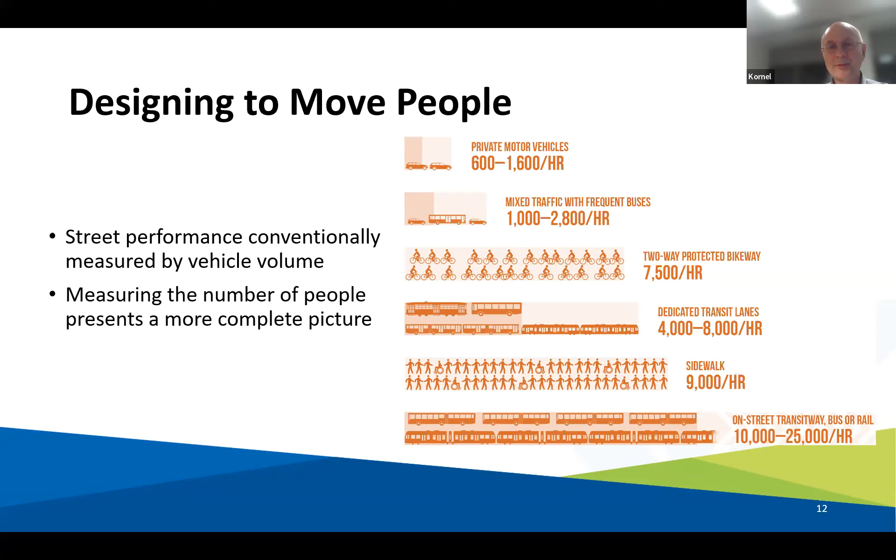The point is that the reason why we have to look at other modes of transportation is that the car is a kind of a beautiful thing to do many trips to many locations. But at some point in the development of a city, the car is the least efficient mode of travel, it uses the most space. So its role must decrease, and it will decrease, I mean.

Next slide. About this project, a little bit about the background. This project started actually in 2019 with the pilot project in conjunction with the city of Waterloo. We had 5 corridors where we implemented separated cycling facilities.

The objective of that pilot project was to see if the separation of cycling on these streets, where we had very little cycling, would help us increase the number of cyclists and attract new cyclists. And actually we learned that yes, the same thing happened in the region as happened in every other city where they separated cycling facilities from motor vehicles.

We had a significant increase in the number of people, and people who would never cycle on those streets, including me, for example, on Columbia - I would never cycle on Columbia, but with that little separation that was there, I did cycle on Columbia, and that's what we heard from other people as well.

So we went to council, we presented the results of this pilot, and there were 2 things that we learned: that yes, this is an effective way to increase cycling. And the second thing we learned is that the way we designed the pilot - and the pilot is always kind of quick and cheap and dirty, what you can put together at a relatively low cost - that design has a relatively high maintenance cost, winter maintenance cost.

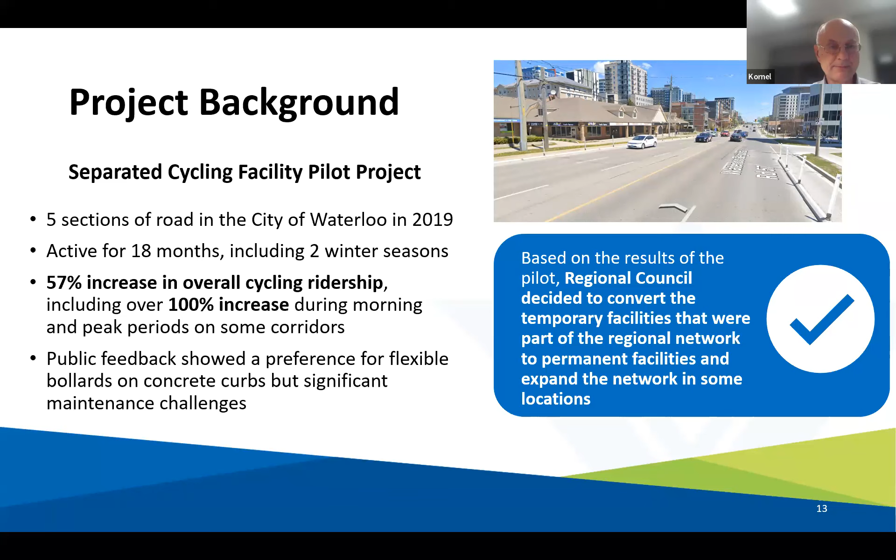Why separate these cycling facilities? Those who are cycling regularly or from time to time probably don't really need me to answer that question. But I still felt it's important to say the reason we separate cycling facilities is primarily safety. Cycling in mixed flow traffic is not the safest thing to do, especially if you have high volume, fast vehicles, and fast is already 50 kilometers per hour, because if you are hit by a vehicle at 50, chances of survival are not so great.

And what we also heard from the public, especially the elderly, is that they don't prefer having cyclists in the same lane as they are traveling. They are afraid of hitting them, and cyclists sometimes do crazy things, and that was also pointed out to us. From that perspective, separating cyclists, putting them into another space, is a much safer and better solution for all road users. Only a small percentage of the population would cycle in mixed flow traffic, up to 3 to 5%. And we also know that most of the population, more than half, is interested in cycling, but they are what we call concerned - unless they are separated from vehicles.

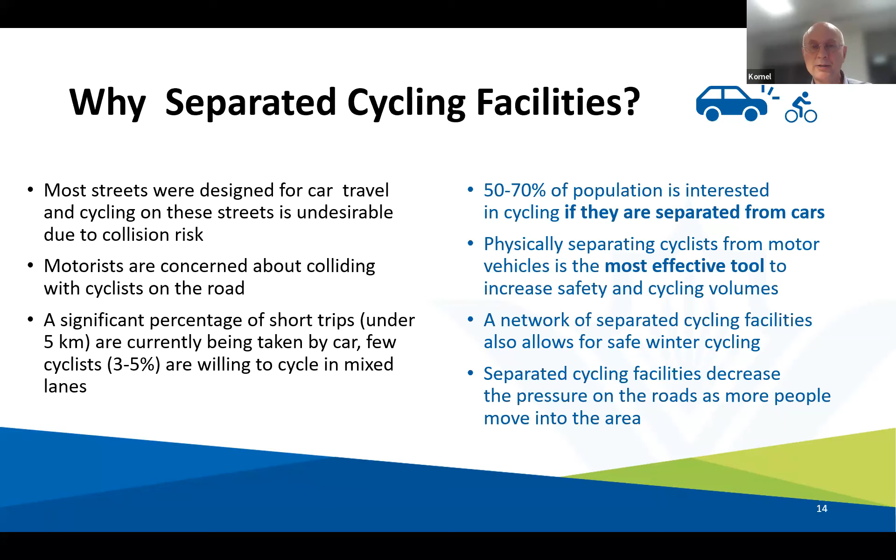And finally, I got to the road diet. Road diet—nobody likes diets, and maybe it's not the best way to call what we are trying to do in some of the corridors, but this is the language we use in the TMP. The reason we call it road diet is that we have to find the space for cycling facilities. Sometimes there is space in the right of way, for example a section of University Avenue, so we are leaving the existing lanes more or less as they are. But in some other corridors there isn't space, so we have to reallocate it—making the roads reserved for vehicles narrower. In the 2018 TMP, both Bridgeport and Erb Street were identified for the diet.

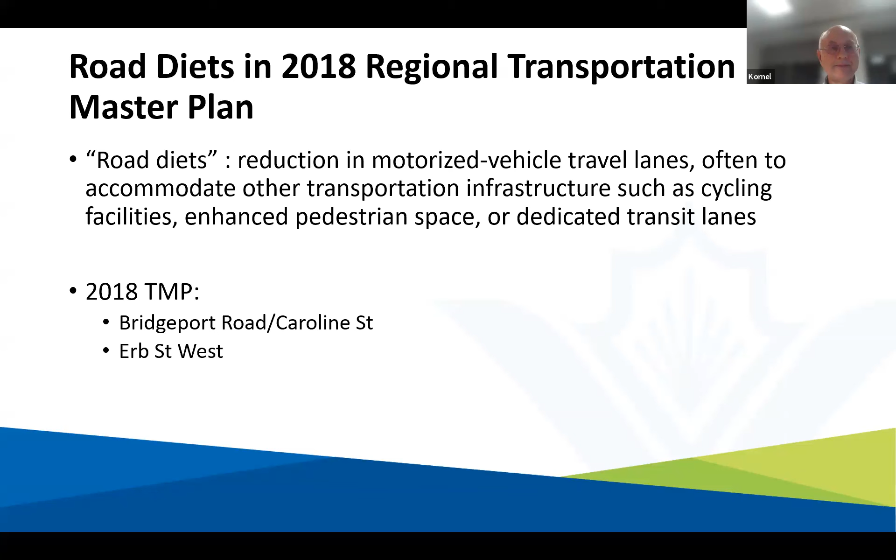Project scope. There are quite a few corridors in this project, and we group them into two categories. Some are by conversion—meaning the conversion of the pilot project to permanent facilities—and the other sections are the expansion part, where there are no facilities today and we are adding new facilities. I'm going to show you, you don't have to read this.

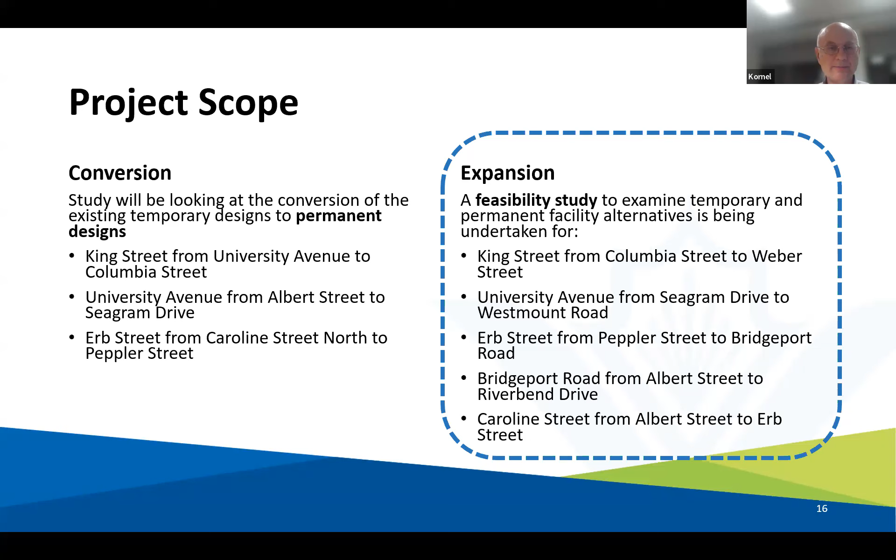You'll see this on the map on the next slide. These are the corridors we are studying and presenting to you tonight. On King Street, for example, the dotted line means the section that already has cycling facilities, and the solid section is the new section. University is similarly new and existing sections.

For streets where we already had cycling facilities through the pilot, the decisions were much easier, because we basically continue the type of facilities or concept applied in the pilot for the ultimate design—meaning whether it's single directional, two directional, one side or both sides of the road. On Bridgeport and Erb, we only had a very short section in the pilot on Erb Street, shown as the dotted line. So the solid line on Bridgeport and Erb, being much longer, is basically the biggest change here.

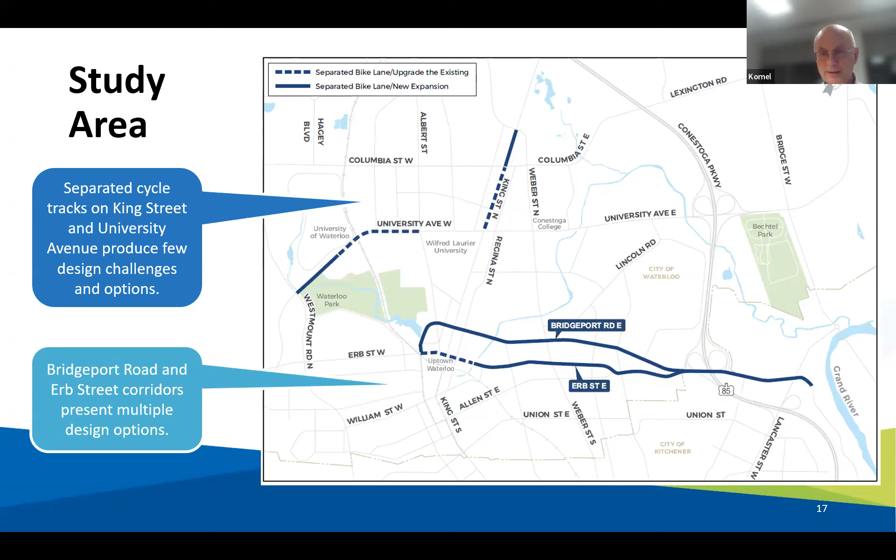And I think the next slide is going to be the consultants.

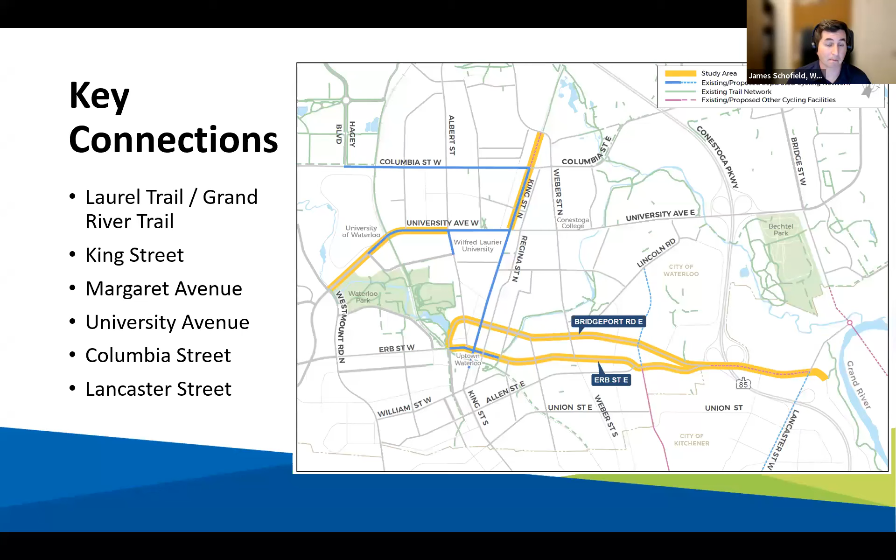So you can see that this is a project that's not working in isolation. They're not five isolated corridors, they're really part of an overall cohesive network that forms several important connections that will help you get around Kitchener and Waterloo.

Some key considerations we thought about throughout the project: over at the east end, there's an opportunity to connect to the Grand River Trail system from the end on Riverbend Drive. There are existing signalized intersections along Bridgeport and Erb at Margaret that make for a nice connection opportunity to the north and south, and there's future and existing facilities on Margaret Avenue as well that we can tie into.

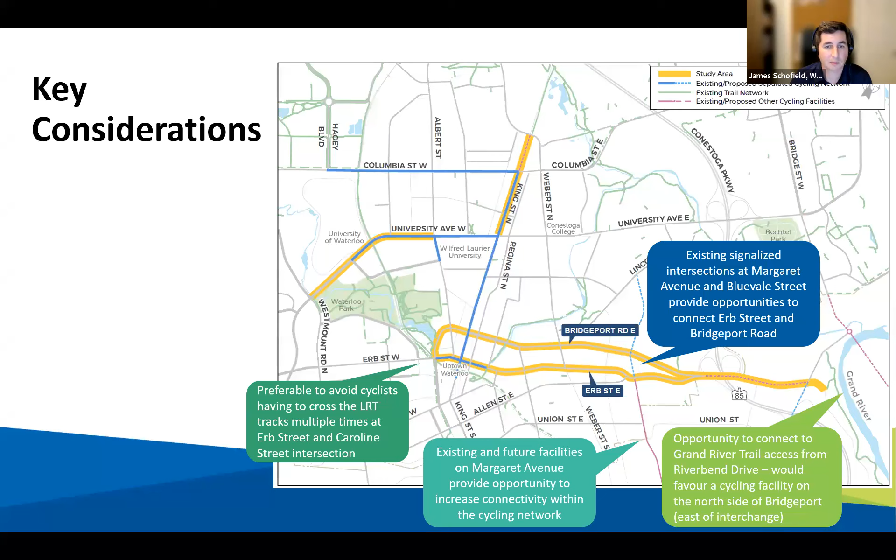In the Uptown Waterloo area, the intersection at Caroline and Erb is quite complicated, with the LRT crossing diagonally through there. So quite a bit of consideration went into how we get cyclists through that intersection and minimize the number of times people need to cross over the tracks. These are some of the key considerations throughout the project.

I'm going to talk a little bit about the evaluation process. If you were here at the first public meeting last year, some of this will be familiar, but the evaluation process is fairly complex because of the number of options on Bridgeport and Erb, being a pair of one-way streets. How do we go about thinking about the best approach to implementing cycling facilities on those streets?

Step one: we thought about what's the best type of cycling facility for each corridor. Is it a painted bike lane on the road? Is it a multi-use path? Is it a separated cycle track? We'll talk a bit more about what all of those terms mean in the coming slides.

Step two: should the cycling facilities be going one way or two ways? Because Bridgeport and Erb are one-way streets, does it make sense to have the cycling go the same direction as the traffic, or to allow cyclists to go in two directions on those streets?

Step three: looking at what side of the street the cycling should be on - the north side, the south side, or both sides. That was another consideration. Step four: looking at potential connecting facilities between those cycling corridors, like Margaret Avenue and the trail at the east end of the corridor. Step five: identify and mitigate the potential impacts of each design alternative.

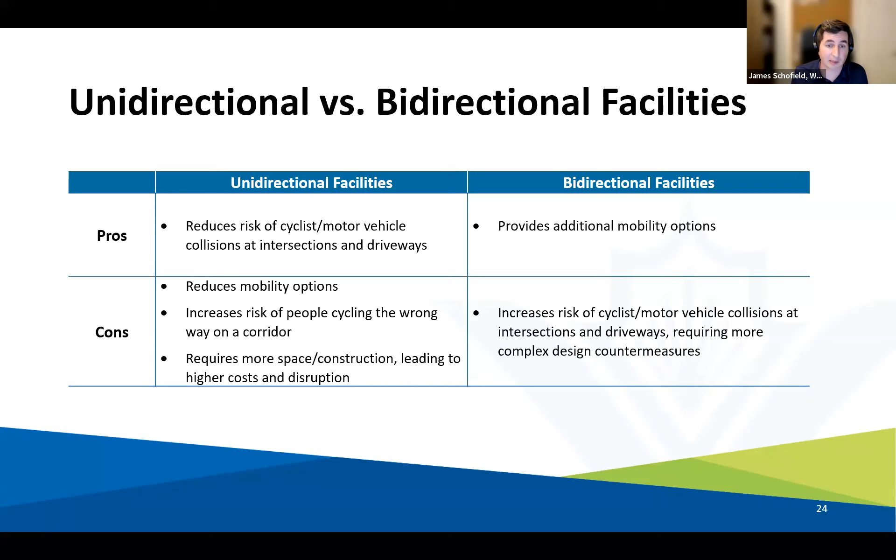When we talk about separated cycling facilities, there are a few different types, and you may already be familiar with some of these throughout Waterloo region. On the left, we have separated bike lanes—a bike lane within the existing roadway. Like the pilot project facilities implemented earlier in Waterloo, these can use temporary or quick-build materials, like concrete curbs installed onto the existing roadway, or flexible posts or bollards to help delineate. It's a cycling facility often retrofit within the existing roadway with some measure of physical separation between cyclists and adjacent motor vehicles—something more than just painted lines on the road.

Meanwhile, when we talk about cycle tracks, we mean something actually above the curb—often next to the sidewalk or at the same height, but with a curb separating that cycling facility from motor vehicle traffic. So cycle tracks are above the curb, usually next to the sidewalk, and separated bike lanes are below the curb within the roadway. The third option is a multi-use path, which shares similarities with the cycle track in that it's above the curb. The main difference is that a multi-use path is shared between cyclists and pedestrians, whereas a cycle track is exclusively for cyclists.

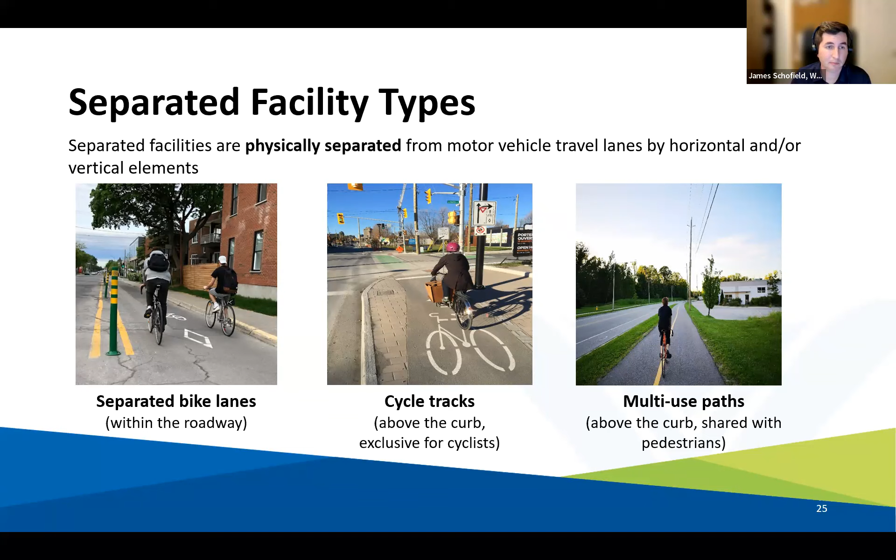In the earlier stages of the project, we looked at a number of different design alternatives, especially for the Bridgeport and Erb corridors, which were the most complex parts of the project. We evaluated these alternatives using a number of criteria, listed here, including traffic and transportation—looking at how effective the design would be at achieving the cycling mode share shift that Cornell was talking about earlier, and what the impacts would be on motor vehicle delays or queuing, noise, and air quality.

We looked at safety and conflict mitigation, between cyclists and vehicles, cyclists and transit, conflicts especially at the Highway 85 interchanges, and mitigation measures for all those types of conflicts. We looked at utilities, trying to understand if particular design alternatives presented more challenges—for example, a series of hydro poles being in the way of the desired location for the cycling facility. We also looked at constructability, how much effort it would be to build and the complexity of that, and the cost to construct, operate, and maintain the facility.

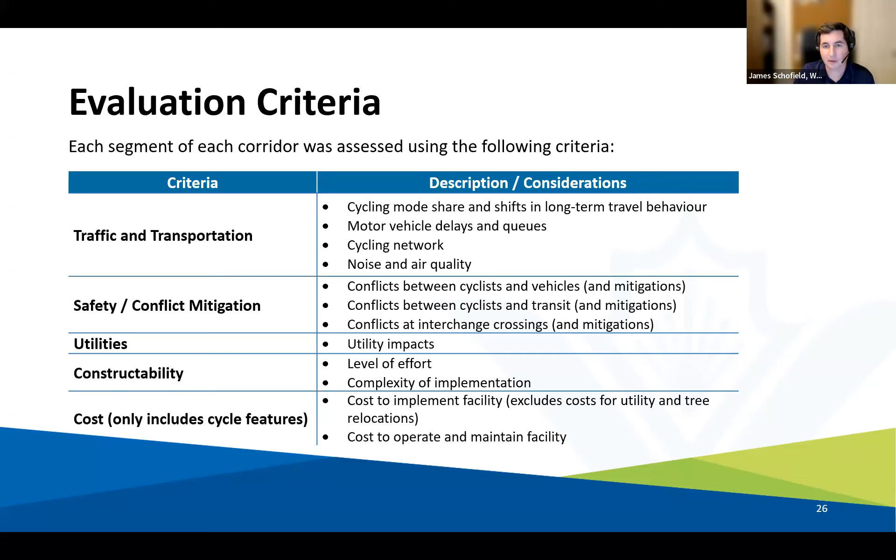These were all the criteria considered as part of the evaluation process, which ultimately led to the selection of a proposed design alternative. The proposed design we're presenting here, we'll go corridor by corridor and talk about each. Let's start with King Street.

On King Street, what we're proposing is essentially very similar to the existing pilot project, shown in the image at the top right. The pilot project used concrete curbs and flexible bollards put on the roadway to implement a cycling facility quickly using those retrofit-style materials.

As King Street is reconstructed, the proposed plan is to take those cycling facilities and move them from the roadway up into the boulevard, so there's more separation from traffic and we narrow the width of the roadway. You'll still have the same number of motor vehicle lanes on King Street—one lane per direction—and a center turn lane in the middle of the street. However, the cycling facility, currently in the roadway, will move up into the boulevard, achieved by taking the existing curb and moving it inward toward the center of the road.

So the design has the cycle track in the boulevard adjacent to the existing sidewalk, with a buffer between the cycle track and the roadway. You see the same configuration on the other side of the street—cycle track and sidewalk. These cycle tracks on King Street will be unidirectional, or one-way: cyclists traveling north on this side of the street and south on the other side, just as it is today with the pilot project.

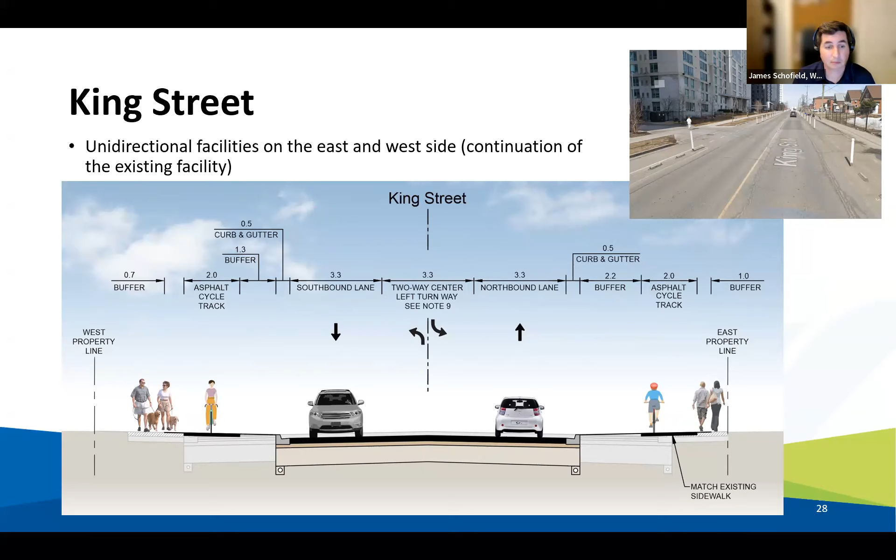An example of a typical intersection along King Street is shown here. This is showing the intersection of King and Columbia, and you can see that we're going to attempt to make connections between all of the intersecting cycling facilities, such as the one along Columbia Street, using a type of design that you may have heard called a protected intersection. So we're trying to apply protected intersection elements to the design to make those seamless connections, making it easy for a cyclist who wants to turn left, for example, to come along here, tuck into this corner, wait for the light to change in the opposite direction, and continue along Columbia Street.

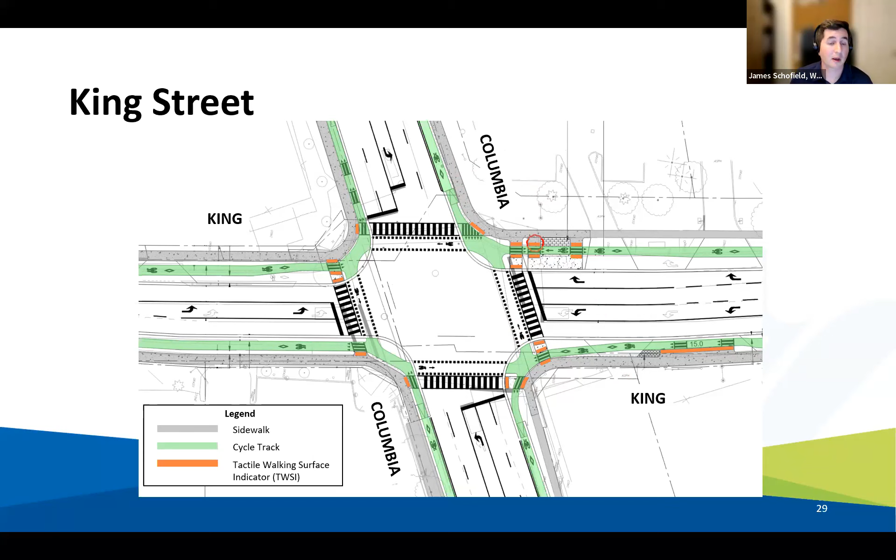So this is a typical intersection along King Street. And at the end of the presentation, we're going to share a link with the complete design drawings, so if you want to go look into the details more, you'll be able to do so.

A rendering of King Street showing the existing condition on the left and the proposed condition in the future on the right. Again, you see that existing on-street bike lane becomes moved up into the boulevard and the curb position moves inward. Same number of motor vehicle lanes though: it's 3 lanes existing and 3 lanes in the proposed future condition.

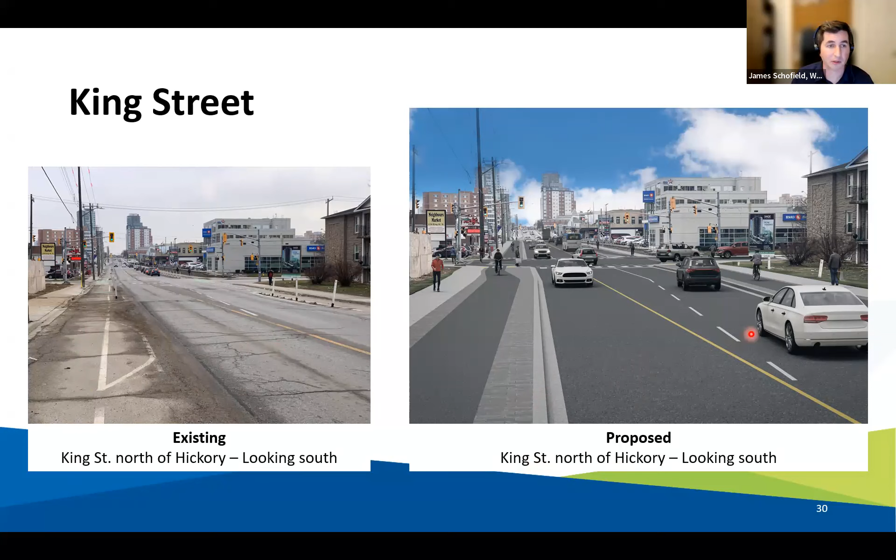Moving along to University Avenue. It's similar to King Street in that we're taking existing bike lanes that are currently on the road and moving them up into the boulevard by pulling the curbs inward towards the center of the road. There's not going to be any change in the number of travel lanes on University Avenue—it will remain as it is today with 2 lanes per direction. We're looking here at the portion west of the University of Waterloo campus between Seagram and Westmount.

Again, similar to King Street, we have an asphalt cycle track up in the boulevard. Sidewalk is next to it, and a bit of a buffer between the cycle track and the roadway. Similar condition on the other side of the street. We are suggesting a short segment of 2-way cycling on this portion of University Avenue to provide better connectivity to and from the UW campus from Westmount Road. So there'll be eastbound on the south side of the street and a 2-way facility on the north side of the street in this segment.

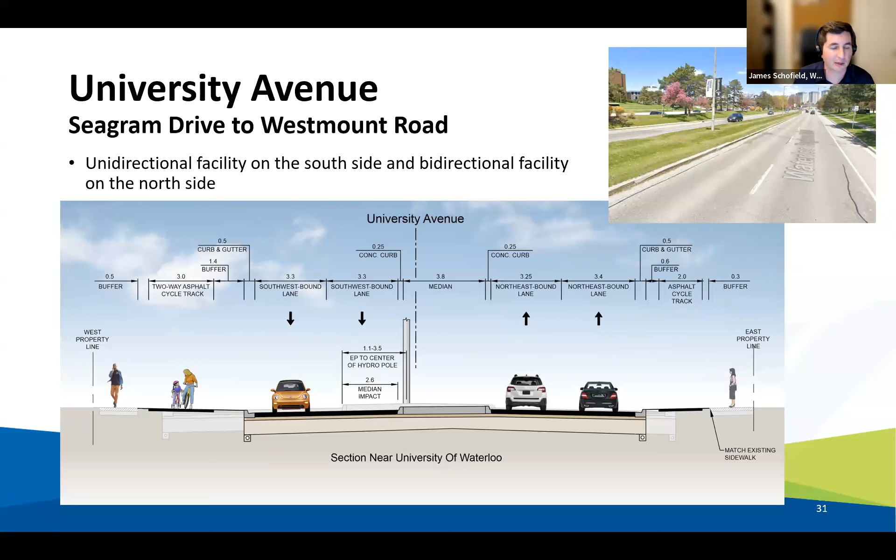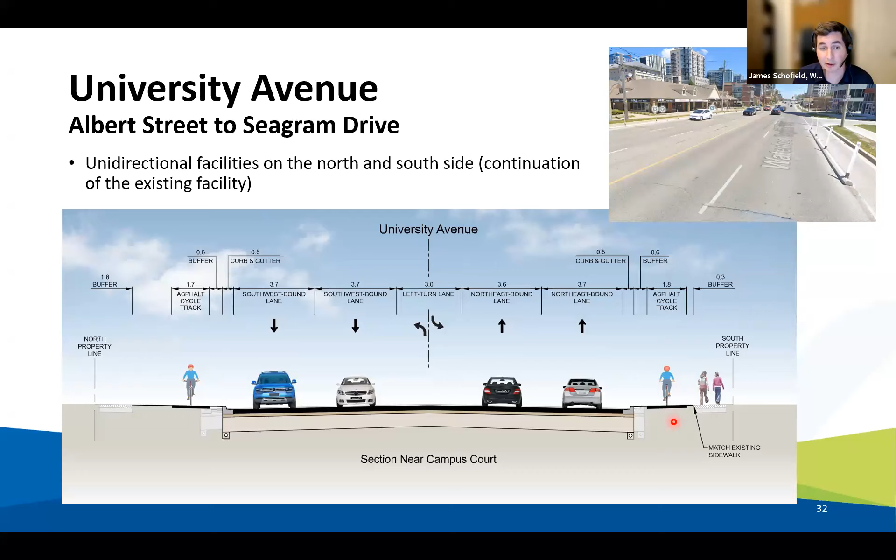As we move east along the corridor, east of campus now, we again maintain the same lane configuration that we have there today: 5 lanes in total, 2 lanes each direction, and the center left turn lane. Again, what we're doing is taking that existing on-road separated bike lane that was implemented as part of the pilot project and moving it up into the boulevard, converting it into a cycle track next to the sidewalk.

Another drawing of a typical intersection here, this one showing the intersection of University and Seagram. You'll note a number of similar design features as the King and Columbia intersection shown previously. You'll also note there's integration with transit stops here on both sides of the street, so there'll be a nice wide platform for people to get on and off the bus, and a place where a bus shelter could be placed.

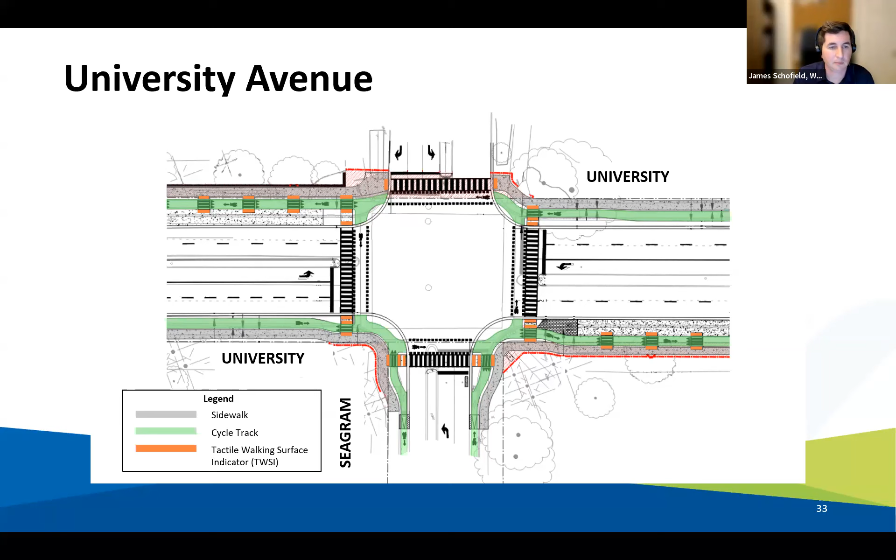When we come to Bridgeport and Erb, these were much more complicated corridors. Unlike University and King, where it was fairly straightforward to just take the existing design from the pilot project and carry it forward, we really had to think a little more critically about Bridgeport and Erb. We came up with 4 different design alternatives for these corridors.

Alternative 1 was having cycling on the north side of both Bridgeport and Erb, continuing on the north side east of the Highway 85 interchange. Option 2 was being on the south side at the Highway 85 interchange, continuing along the south side along Erb Street, then transitioning to the north in the Uptown Waterloo area.

Option 3 was to have one-way cycling facilities, so westbound on Bridgeport, eastbound on Erb, on the outside of both streets. In both options 2 and option 3, there was a connection here to connect from the north to the south.

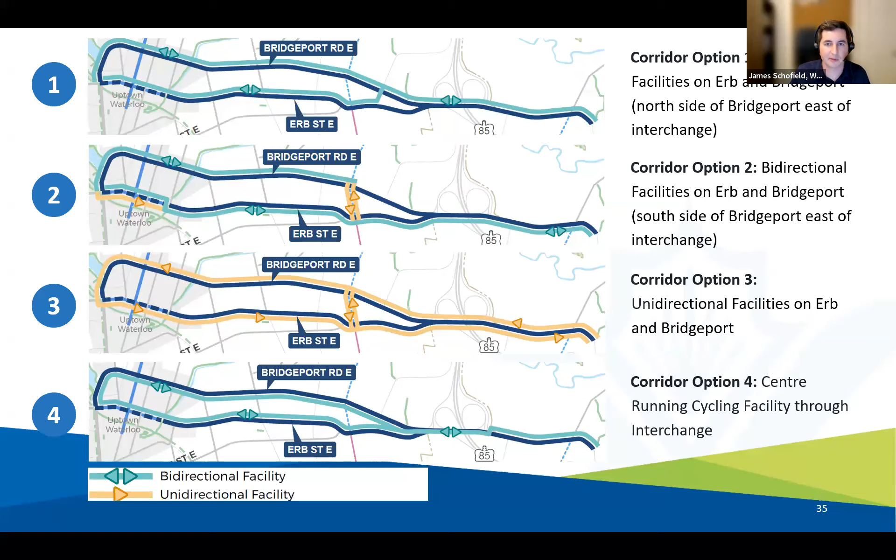So we looked at all 4 of these alternatives and evaluated them using the criteria that I presented earlier. When we came to the first public meeting last year, we had identified both option 1 and option 2 as the top 2 options to carry forward for further study. At that point, we had recommended ruling out option 3 and option 4.

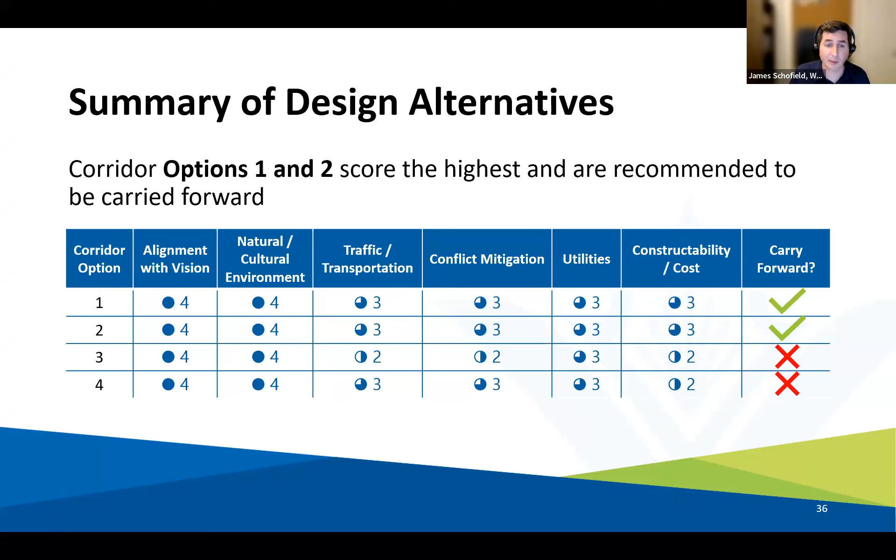Since that time, we've been doing quite a bit more analysis, having more discussions with technical stakeholders about the different options, also listening to the feedback that we received from the public since that first meeting. And option 1 has emerged as the preferred alternative.

So option 1, again, is being on the north side through the Highway 85 interchange, continuing along the north side all the way over past Lancaster Street, and on the north side of both Bridgeport and Erb. If you're coming along Erb, there'd be a connection at Bluevale. You would come along Erb, go on to Bluevale for a short block to get up to Bridgeport, and that's how you would continue along past the Highway 85 interchange.

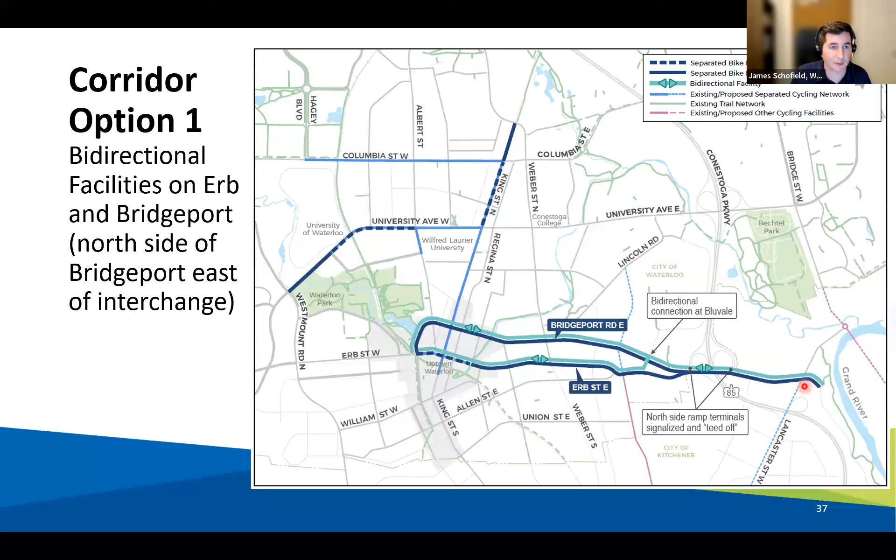Looking at some of the pros and cons of option 1, it kind of meets the project objectives of implementing that complete streets approach, providing that east-west cycling connection. It works pretty well at the intersections. It provides cyclist safety by providing physical separation, having a cycle track up above the curb in the boulevard space. The cost of option 1 was favorable compared to the other options, and there were no significant impacts to natural or cultural heritage environments or to utilities.

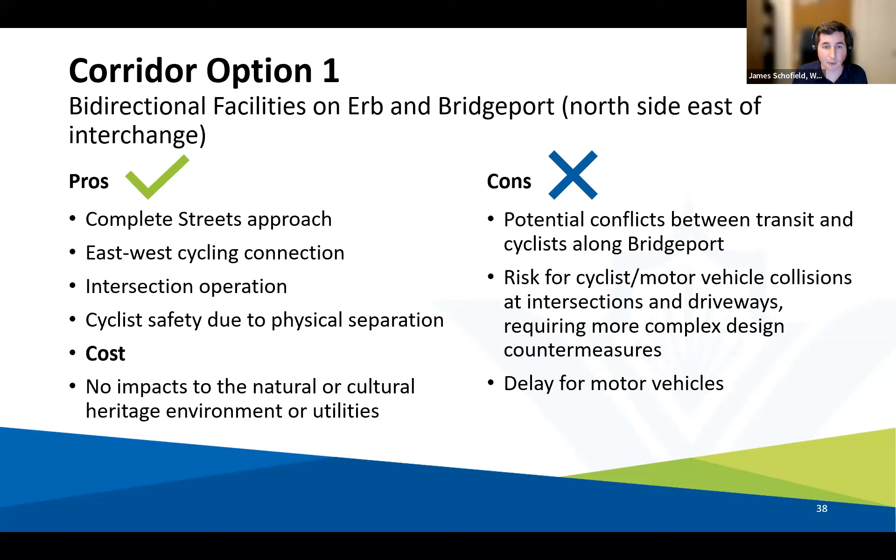Some of the negatives of option 1: there's potential conflict between transit vehicles and cyclists along Bridgeport, or rather passengers getting on and off transit vehicles at the bus stops along Bridgeport. And because of the bidirectional, or two-way, cycling on Bridgeport and Erb, there is a bit more attention required at the intersections and driveways to mitigate some of the risk of having two-way cycling on that street. At some particular intersections, some additional delays for motor vehicles can be expected with this option.

Looking at option 2 in a bit more detail, again, option 2 was one of the 2 options that we carried forward from that first public meeting. Option 2 was being on the south side at the interchange and on the south side along Erb Street. There were 2 sub-options here: either continue along the south all the way to Caroline, or transition to the north at the Laurel Trail crossing and continue into Uptown Waterloo on the north.

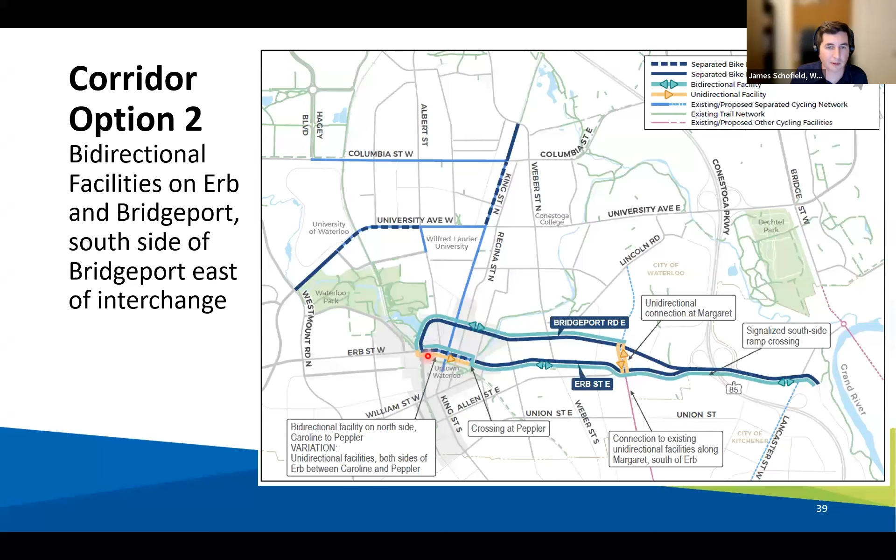So that was option 2. Some of the advantages and disadvantages of that, some similarities here. Option 2 also met the complete streets approach that we're trying to achieve, provides that east-west cycling connection, works reasonably well at the intersections, with similar safety.

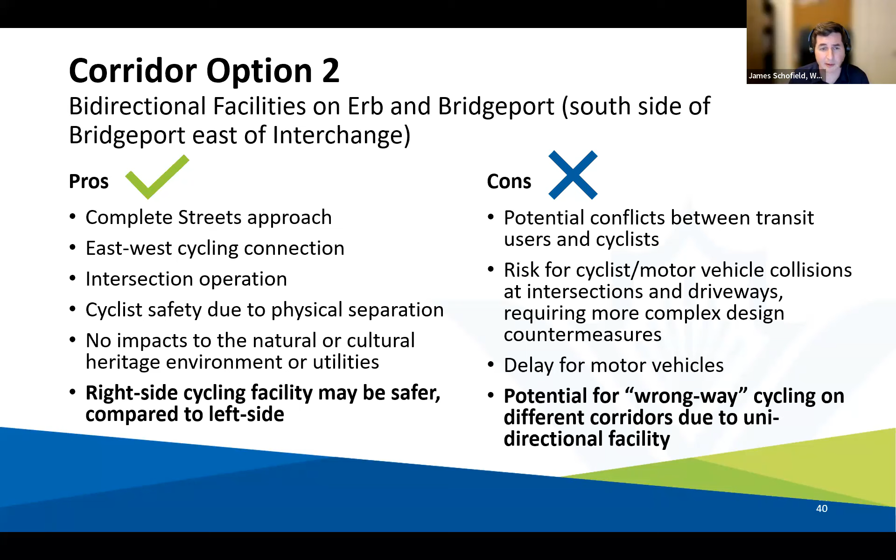There's some argument that cycling on the right side of the road may be slightly safer than being on the left side, so a benefit for option 2 there. We still have some conflicts between people getting on and off the buses and cyclists with this option. We still have some complexity with the driveways and intersections, and we still have some delay with this option. So options 1 and 2 are pretty comparable on those points. There is a short unidirectional cycling portion through Uptown Waterloo with option 2, which introduces some potential for wrong-way cycling in that Uptown Waterloo portion of the corridor.

And so, as I mentioned, option 1 was ultimately determined to be the preferred option. We heard from technical stakeholders, including the Ministry of Transportation, that their initial preference at the Highway 85 interchange was to be on the north, following option 1. This is still yet to be confirmed, as discussions with MTO are ongoing.

The City of Waterloo's Active Transportation Advisory Committee voted in favor of option 1 as their preferred option. And from the public, there was a clear preference for option 1 in the feedback we received since that last public meeting last year. Some of the themes of the comments were that people felt it provided comfort due to the physical separation of the cycling, that it provided good connections to other existing cycling facilities, and that it actually reduced the number of driveways that need to be crossed. I believe that's largely due to being on the north side east of Highway 85.

There was feedback that members of the public felt that it was the safer of the two options at the Highway 85 interchange. There was support for the fact that it would help calm down traffic on Bridgeport and Erb, since feedback indicates traffic today is quite fast moving, with some speeding along those corridors. In terms of having to cross Bridgeport and Erb to use the cycling facilities, with option 1 you're on the outside of the corridors, to the north and to the south, which helps reduce conflicts between cyclists getting on and off of those corridors.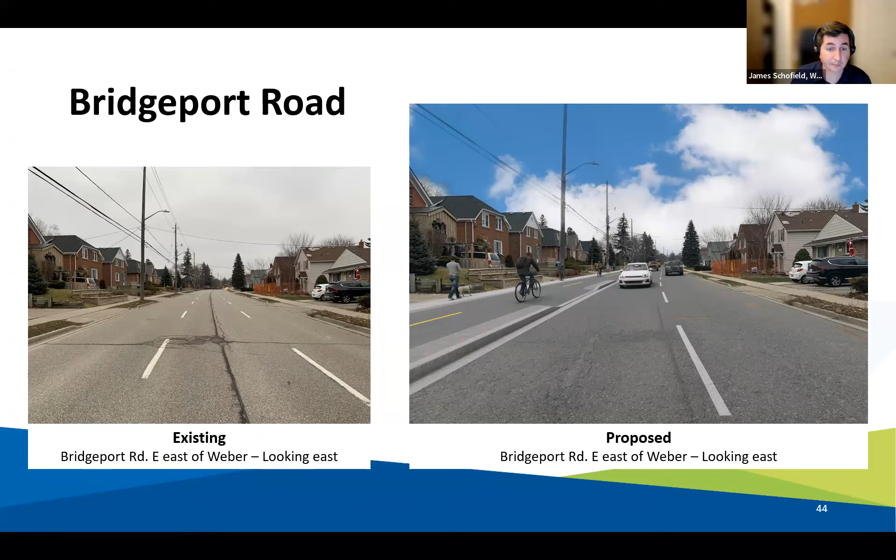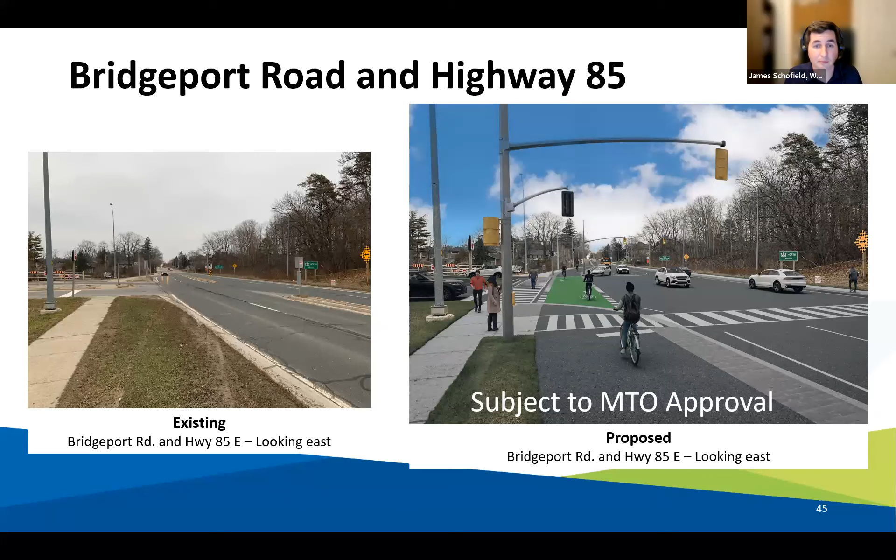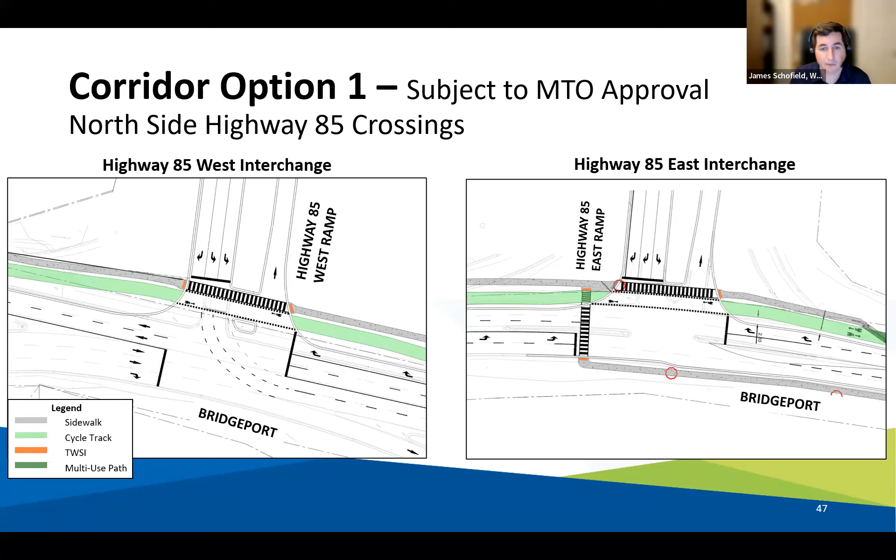Here's a schematic view of the interchanges. The existing ramp comes along and forms a yield condition. We're proposing that slip lane be closed off and all traffic be diverted to a T intersection, as described—cycling continuing east-west through the intersection, sidewalk there, and all traffic governed by traffic lights. It's a very similar situation at both sides, with the west ramp on the left and the east ramp on the right, in a very similar configuration.

Now, what I've been talking about so far is the ultimate vision—what these streets look like when they're eventually reconstructed, the curbs moved, drainage adjusted, and the cycle track rebuilt above the curb. That's probably fair to say a long-term vision for the corridors.

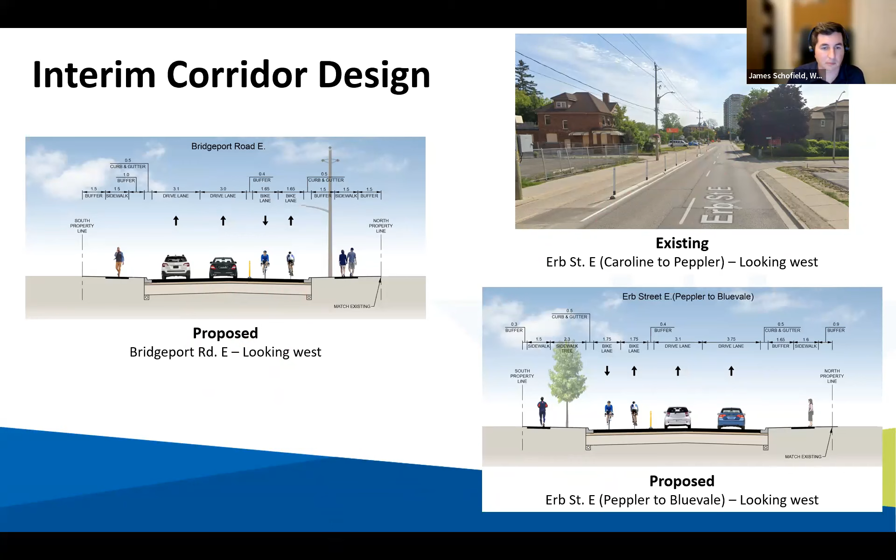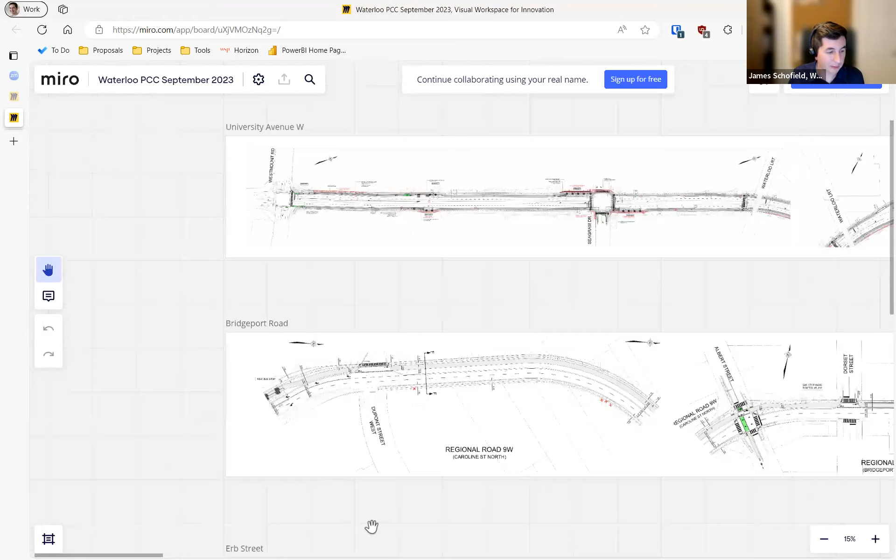We're not going to go through it all interactively here tonight, but maybe I'll just click on this link and bring it up to show you what you'll see. You'll be able to move around and look at all the different elements of the corridors: King Street, University Avenue, Bridgeport Road, Erb Street, and you can zoom in at any location to look at the details.

I'll jump back to the presentation here. I see that my colleague Justin has shared a link to the board in the chat window as well, so you can click on the chat button at the top of your screen and access that link if you want to go in now and take a look around. But at this point, I'll turn it back to Kornel to talk about timelines.

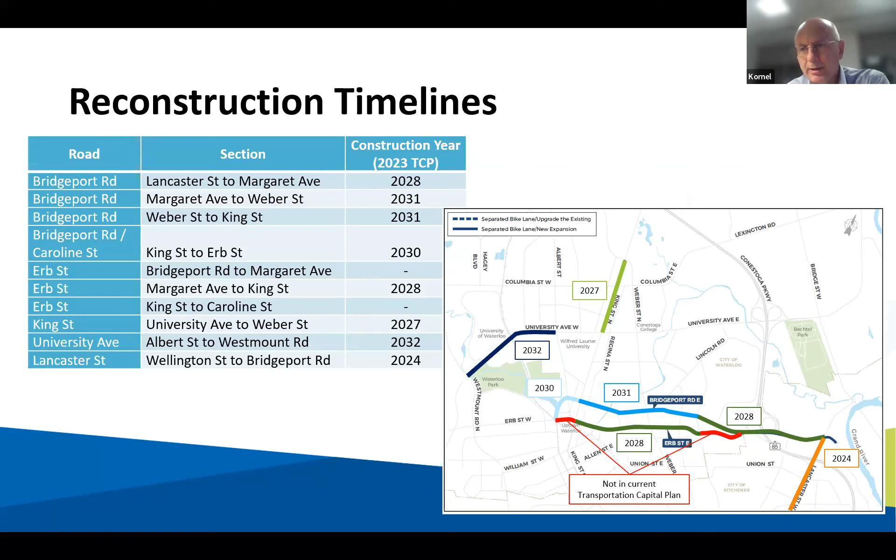Okay, timelines. That is not my favorite slide. As you see, the timelines based on the current financial planning of infrastructure projects put quite a few of these projects a little bit into the future. Projects of this type are typically implemented in conjunction with other infrastructure projects.

So we have to change the pipes under the road, various utilities - that's when we dig up the entire street and put it back differently with the cycling facilities. The reason why we did this study was so we have the plans on the shelf, so if things change in terms of timing, we are immediately ready to go ahead with the projects.

So the first project that's going to happen, or the soonest, is Lancaster Street, which is actually not part of this study. All the environmental assessments and most of the planning has been done for that, and that's planned for '24. I believe King Street is the next one, from University to Weber Street, and the other projects are coming later.

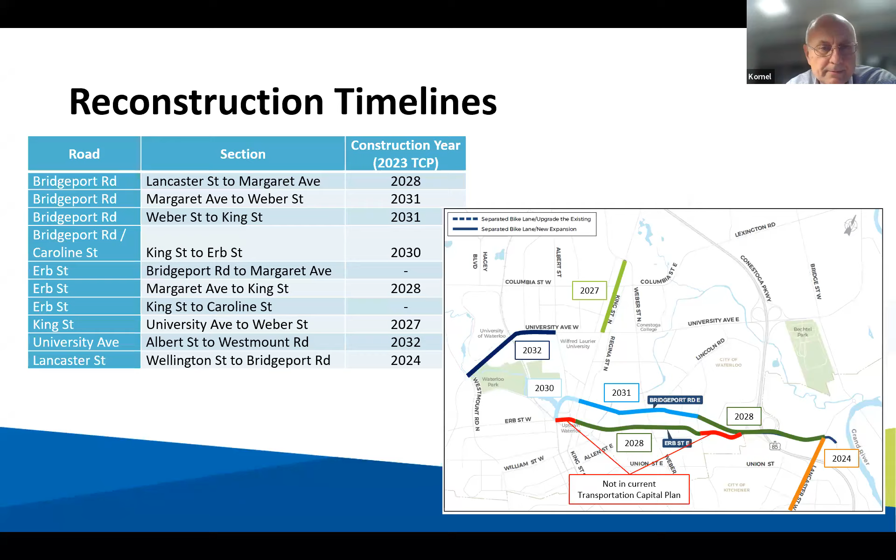Conclusion and next steps. Please provide your comments. You can provide them on the Miro board, or there's also a survey on the Engage WR website. If you want to be specific to some design elements, the Miro board is probably better, but you can use either of the two channels to communicate with us. You also have the emails of the project managers, the consultant, and the regions, so you can send those as well through those channels.

You will have a recording of this presentation, and if you haven't subscribed, you may want to subscribe. If there are some updates, those will show up on the website, or we will be sending emails automatically when things happen. Next slide.

And actually, we are at the end. Thank you for all those who stayed with us. I think the time is for questions and answers, and there are some questions already in the chat. So I'm asking James to start, and let's go through those questions, and somebody will respond.